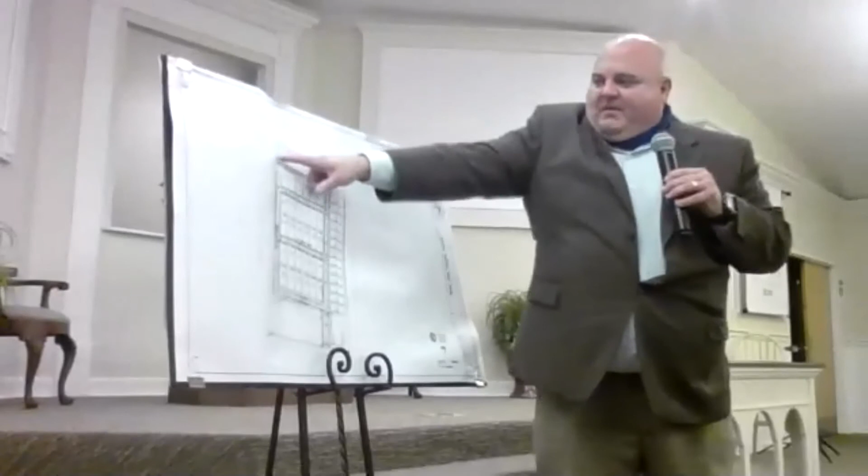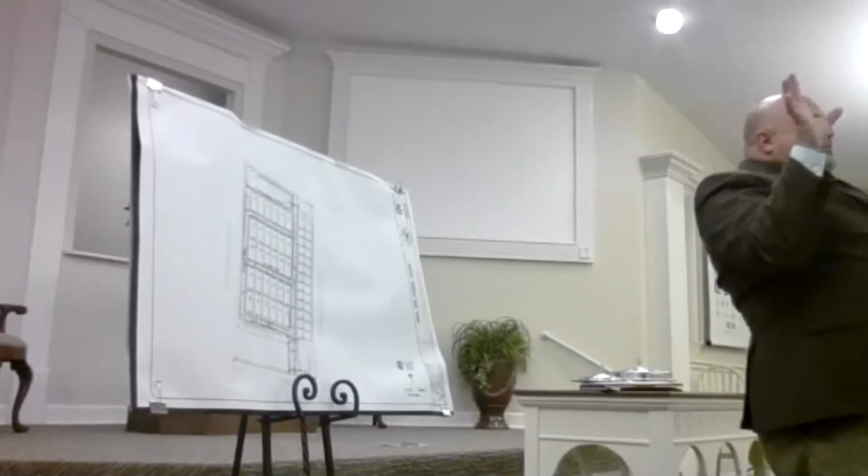Also, relative to detention, we have two detention areas - one in the back and one in the front. The requirement of Metro is that we not only detain the water, but also filter it, so at the end of the day what we discharge must be at or below the pre-developed amount. That is a study that is done - a big book of calculations, and those calculations are reviewed by Metro Stormwater and their engineers. All engineers throughout the United States and most of the world use the same calculations, so we're all on the same sheet of music at the end of the day.

Also, a couple of things that have previously been brought up: the price point will be in the mid 200s. They could reach 300, a little greater than that with options.

Other communities that have been developed with the proposed homes we're calling for here that you can go take a look at are Amberton, Davenport Station, Pinhook Place, Hamilton Church Manor, and Chelsea's Way. Those are located throughout Nashville, and one of them is in Franklin.

We had a previous question regarding students, because student capacity is important to make sure schools are not overloaded. So we reached out to the schools zoned for this development: Mountview Elementary, John F. Kennedy Middle, and Antioch High School. They all have capacity currently for what we are proposing, because again, this is only 43 units, so as subdivisions go, this is very small.

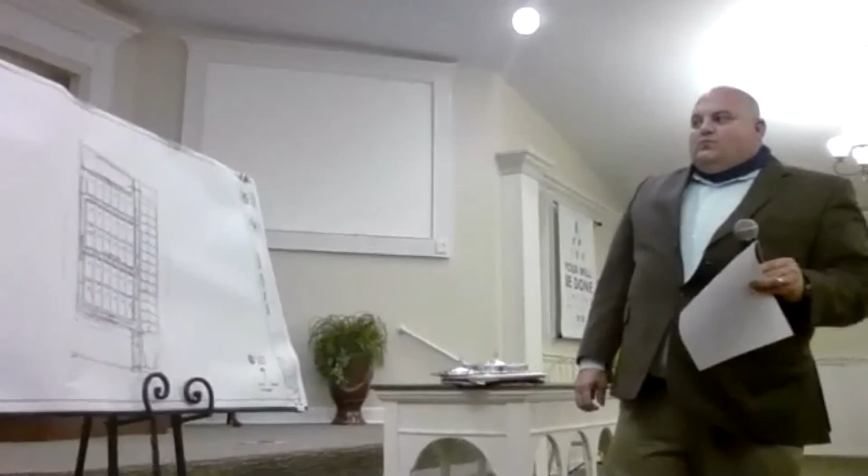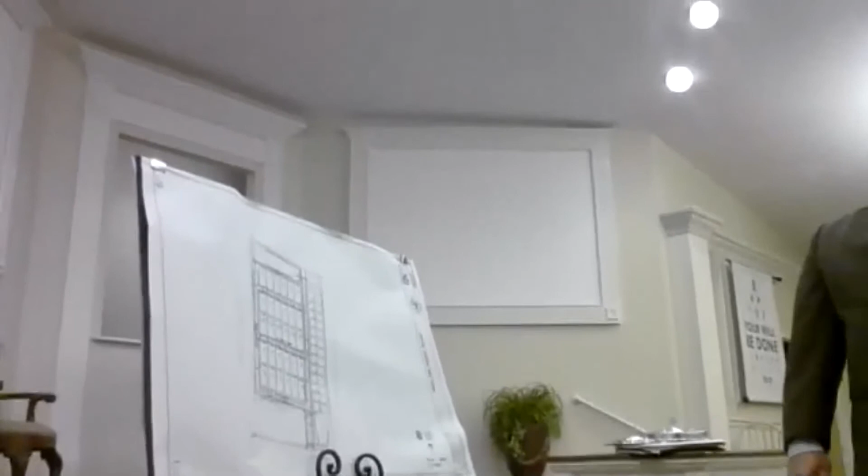Please go ahead, if you'll flip that around. I have a question: you have 43 units there on a grid that puts a lot of traffic on the street. I am the main one of two there now. In our community, we assumed each house would have 2 cars, but you go down through there, some houses have 4 cars, some have 6 or 7 cars. Now with that kind of road pavement and closeness of those lots, you know what that's going to look like.

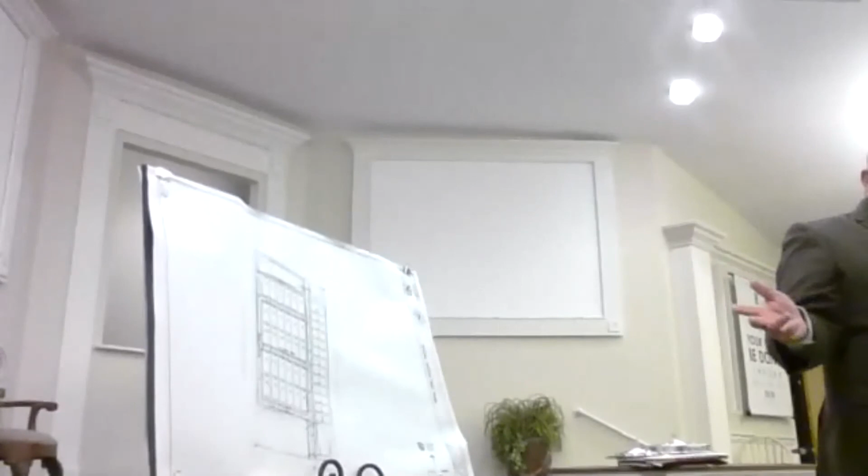The important thing in response to your question is to notice how deep these lots are. They're over 30 yards deep, 33, over 100 foot, about 110 foot deep at depth. That allows us to have 2 cars in the garage. However, as you're probably well aware, your garage becomes a storage area after time, so you don't want a situation where you can't park outside of the garage. In this case, every one of these lots, you can have 2 cars in the garage, 2 cars behind, and in some lots, depending on the footprint, you could even have 2 more behind those.

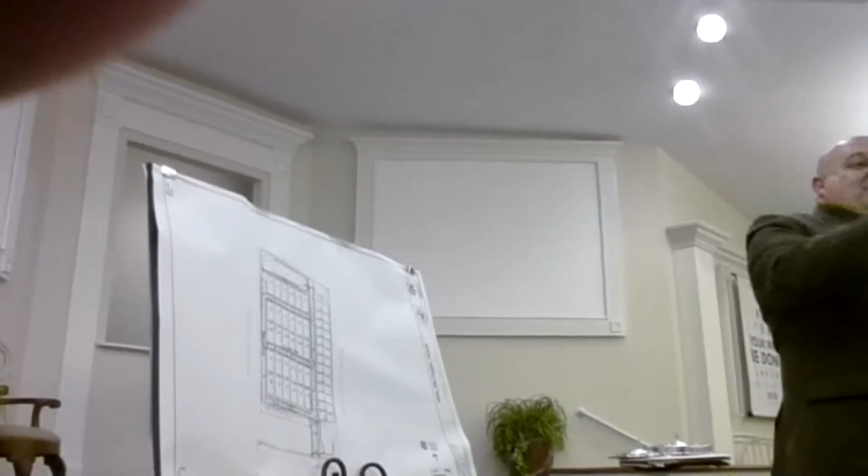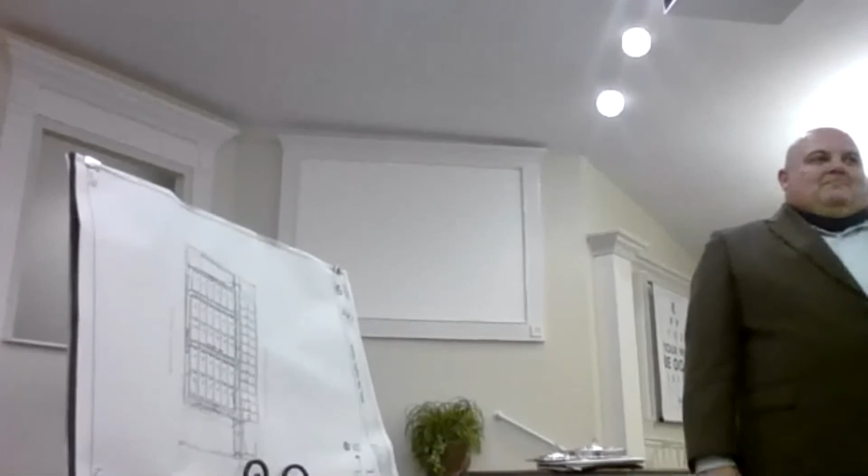Here's my question: typically the garages get filled up, they don't put cars in the garages. Cars behind those two cars block the sidewalks. I know there's codes and all that, and you have people's cars towed and things like that. It also encourages people to park in the opposite flow of direction. In other words, if I'm on the right-hand side driving through there, I'm going to guarantee that at least half of those cars are going to be parked facing me as I'm driving that way. And that's not—you may have a car towed for that also, parking alongside the street.

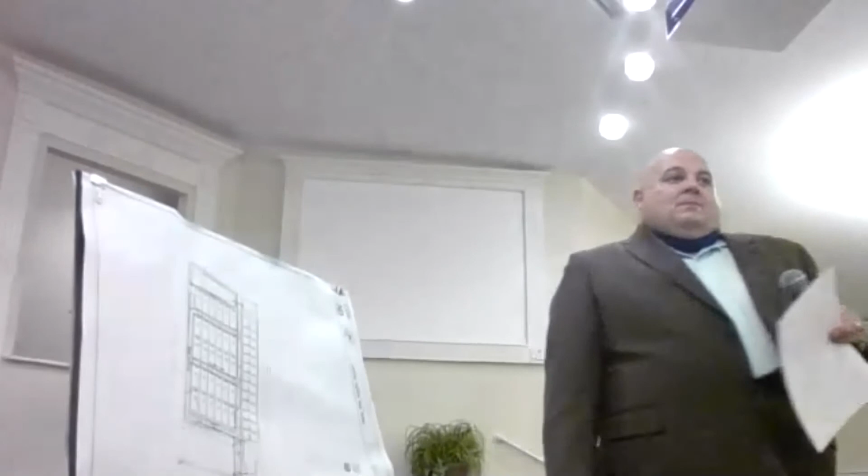But my point is that that's pretty complex. It's not something simple where you've got people in your backyard and things like that. But even in my community, there's generally a problem.

Especially when you get into the loop. We have one loop that basically has 20 cars back. Yeah, it's a lot of cars. I mean, you can't get in there and go around the loop and back out without having to seesaw around and things like that.

And that hasn't changed in over 6 years. Now, the other thing that's interesting is that as we build more of these communities in an area where we kind of started out with not a lot of people, and now we're getting more people.

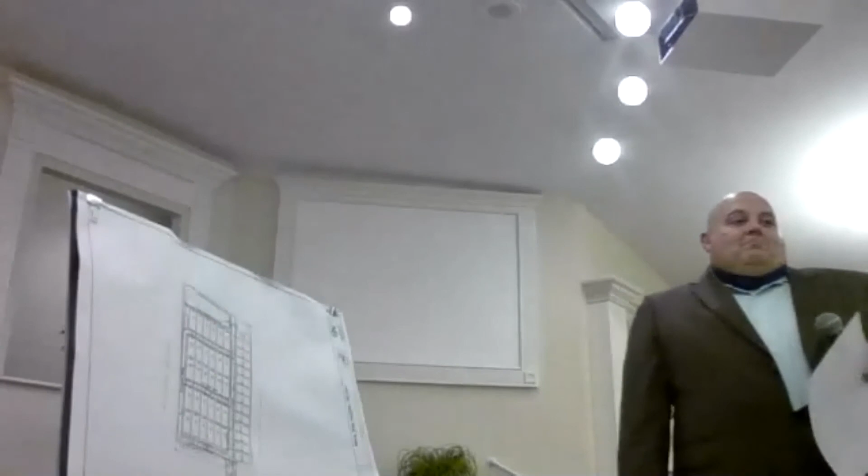We're going to be faced with, as we grow bigger, more cars on the main roads that are traditionally built to handle 2 lanes. A couple of problems with that is the speed conditions, the width of the road, no shoulders, not a lot of them. And some roads, the speeds are incredible, which they should be slowed down. And at nighttime, the lighting is difficult.

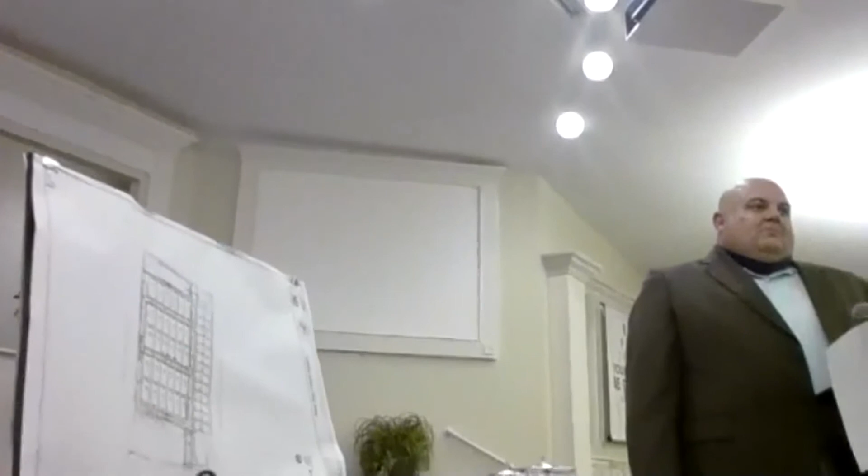You're depending on other people with their bright, zoomy lights trying to get by in a dark area. So as time goes on, there are plans by Metro to take a look at and improve those conditions and to also put appropriate stoplights, so that we're not getting people to get up to maybe the speed of 55 miles an hour, but doing 65 or 70, trying to make a light at those speeds, and it becomes a high impact collision, usually with multiple cars at an intersection meant as a 4-way light type of thing.

I've lived where I live for 15 years, and I've seen everything that I described happen multiple times, year in and year out, but nothing has really changed.

Now, the traffic where I live, it's on a 50-mile-an-hour road. It's hot traffic coming down from the lake, and there's a lot of traffic. Now I have to go around and all this. So there's a lot more truck traffic going on. And we have the same existing lights, virtually none along the stretch. There's a lot of cars that try to get in and get out. And the condition in my neighborhood, my community is 15 years old, and we're already overloaded with cars.

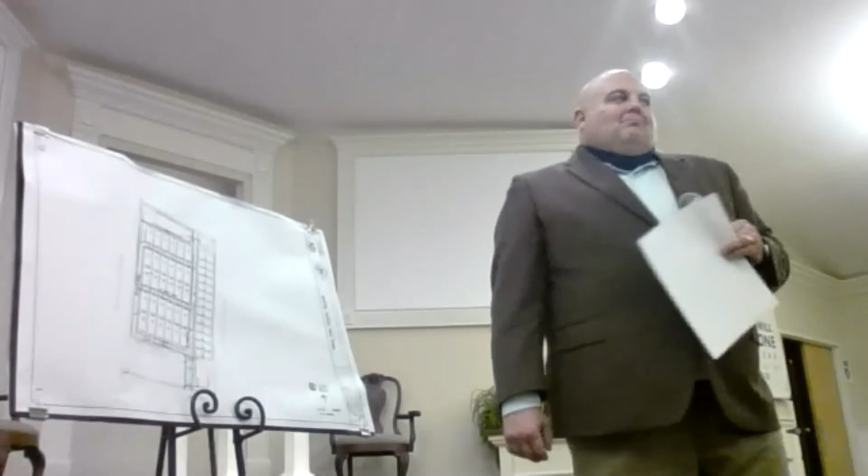It's kind of like... I'm sorry, go ahead.

What I normally do, and I know it sounds dumb, but they know what I mean, is I tell them I want the garage to be set back enough so that I can get 2 cars butt to butt in the driveway. Because when they say 2 cars, what they're talking about normally is a car here and a car there. That's why I said 2 cars butt to butt.

But I also said I don't know about this particular one since we're not actually talking to the developer who's going to develop it, because it's going to Century, and Century is going to be developing it. We've had in the past all this trouble with speeders, so we've asked that we not have roads straight down anymore, that somehow it be curved, or that we put circles in there, because folks are starting, even the new one we were talking about earlier, Carruthers Farms, is having that same trouble because you can come in and go straight in. So anytime you do that, you've got people who just speed in.

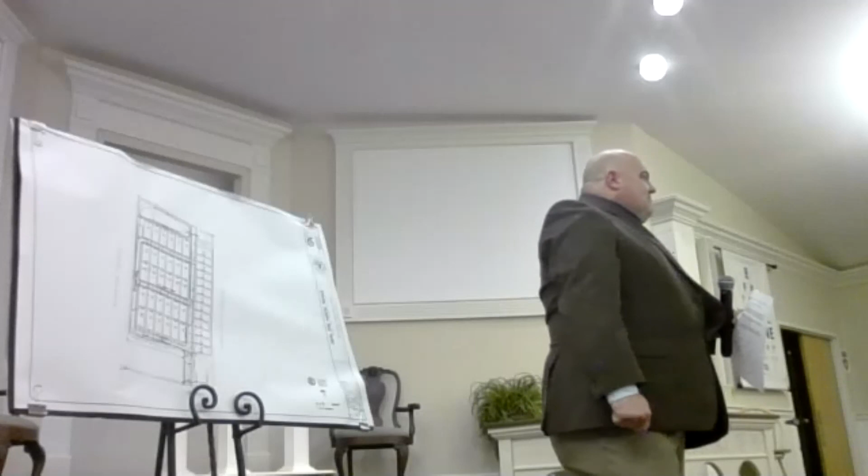So those are 2 of the things, and that butt to butt would help a little bit with what you're talking about in the cul-de-sac, all of those cars, but not all together. So the HOA, we hadn't talked about that, but everybody now is supposed to have an HOA, and giving them some teeth might help with that a little bit. But again, we aren't talking to the person that's actually going to build them, because that's Century. So we don't have Century here to promise what it's going to look like.

So that's one thing that I want you all to think about while we're looking at this one. But the way you communicate concerns is to give it to a person who's going to be talking to the folks that will be developing, so that if we say yes, information gets carried forward.

As we get more into talking with the police force and understanding our roads, the lighting, the safety of them and things like that, you gotta start your message somewhere so it gets to... Oh, correct, sure. I wasn't saying not against that. There's good practices and there's practices that we find don't work very well.

We have something we can do to take the pressure off it. I mean, not eliminate it, but we can relieve some of the pressure. You won't see those multiple cars stacked up on each other in an intersection. You won't see people walking along a dark road because there's no sidewalk. There needs to be streetlights and sidewalks. It's those kinds of things that concern me as we grow, that we have to accommodate the community to be safe.

All right, I think we were back here, and then I had one back here, and then one up here. Really quick, I just want to know what size homes are we doing? Are they doing 3, 4, 5? And I guess I want to piggyback on what the gentleman said here.

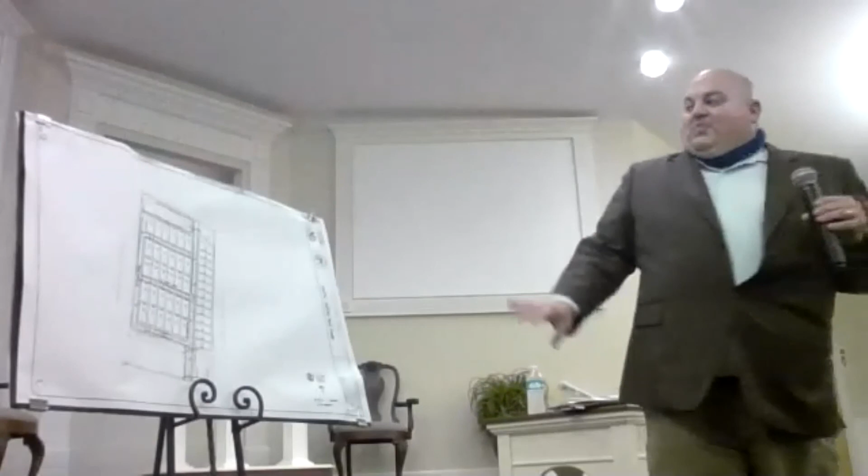Question, what's back there? Those are options, because they're just options. I'm not sure if you're the person I need to ask, but since you're the civil design consultant... Civil design consultant, yes ma'am. With those 43 homes, is there land around where they can go back and say we're going to expand it and put phase 2 on it, or is it just those homes? No, back to the SP, if there were, we'd have to show that. So this is the lot in its entirety. This area back here is not developed, it is privately owned, but the owners that currently own this lot do not own that lot and have, to my knowledge, not approached them. We're not doing anything up here because we don't own it.

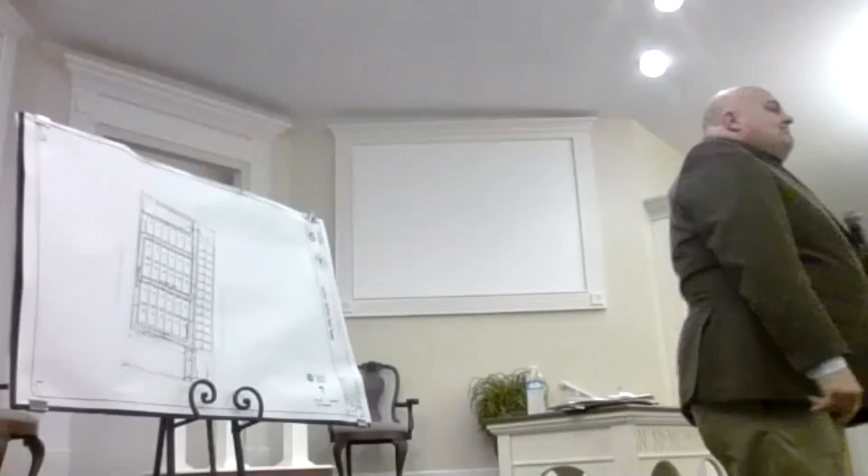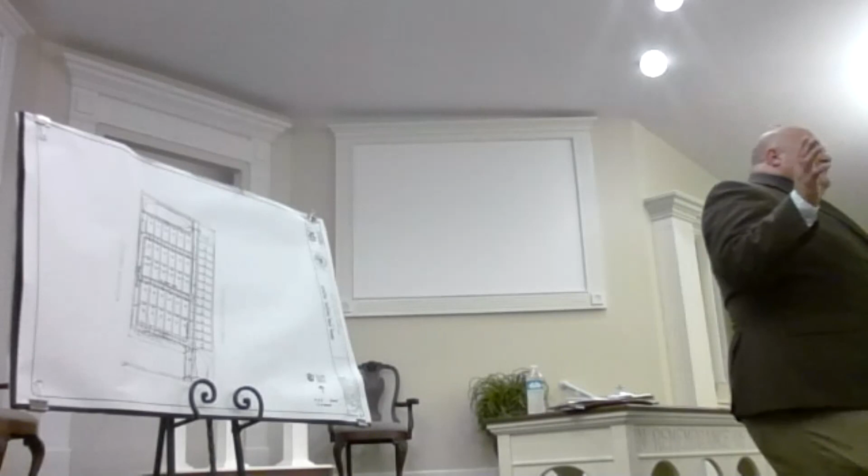As far as the sidewalk, having them not being blocked by cars, with the HOA, is there going to be something put in place that cars cannot block the sidewalk? I'm sure that there would be, absolutely. We designed it so that, with 22 feet, given your standard parking space is 9 by 18 feet, if you're considering your car being 18 feet in depth, you've got 4 feet to play with there to start, so we're setting it up to where they shouldn't block the sidewalks. I think they could add that without any problem.

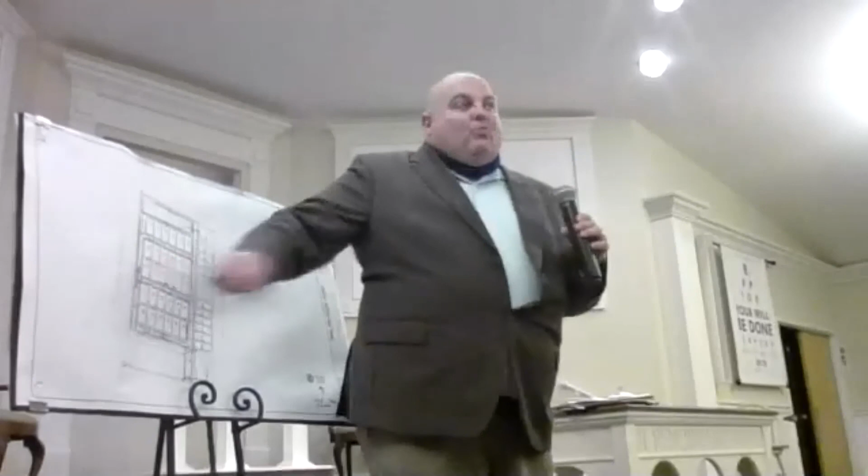Where on Pinhook is this going to be? This is between Lakewood and Weatherstone subdivision. So there are already other subdivisions nearby? That is correct, there's a subdivision both to the left and to the right. This one will not connect to them though. So those 43 homes are going to squeeze into this area that's already kind of developed? That is correct, that is correct, yes.

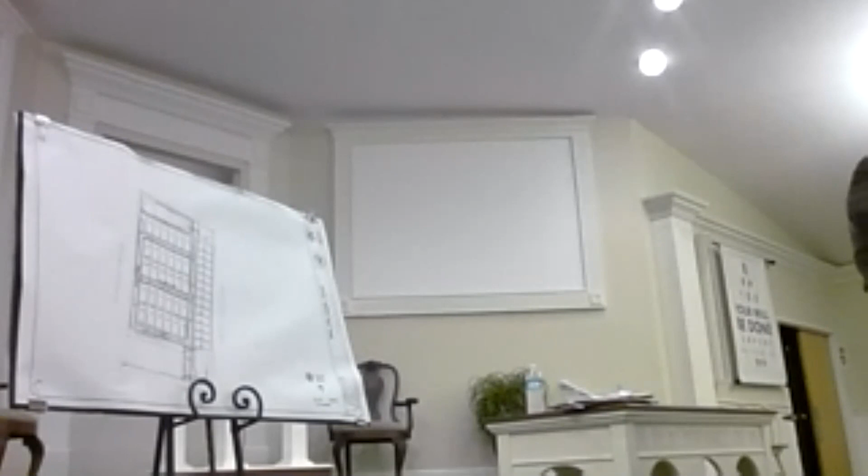Oh, I had him first and then you. Okay, can you tell me the date of your school board review where you said they had capacity? The school board reviews come in based upon planning and their recommendation or requirement that one be done, and they handle that. We took it upon ourselves to contact not only the school board, which we did, and they said they'll defer, planning doesn't need it, that's fine, but we will confirm what the principals told us. We actually went, I myself contacted the individual schools and received a letter even from the elementary school principal that they have capacity for the students. The question was what was the date, and did you get a date for any high school, which is chronically over capacity? I can find that information out for you, and whenever I called them, I can send you the date and actual time.

That school is chronically over capacity, and for you to be squeezing that in, and I guess this is more of a comment for you, council member, with the number of planning that's already approved by council to come in, what does that school then look like if we keep adding density with none of the infrastructure that all these people keep asking about? We're putting people on top of a problem that's already a powder keg without any infrastructure, and into a very explosive situation with our budget and what might happen in December, where it's going to even be more explosive. So I guess I keep wondering why we keep having questions about rezoning or approving zoning to add density to an area that's already overcrowded, overpopulated completely, and no infrastructure. I mean, that just has to be the question.

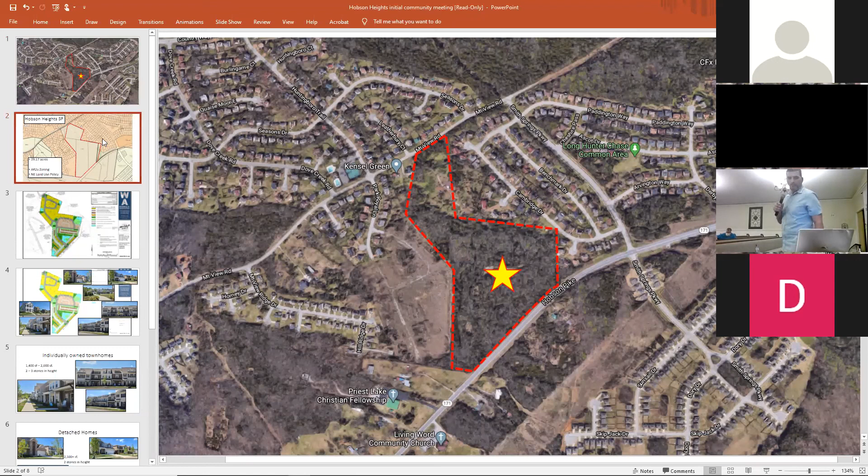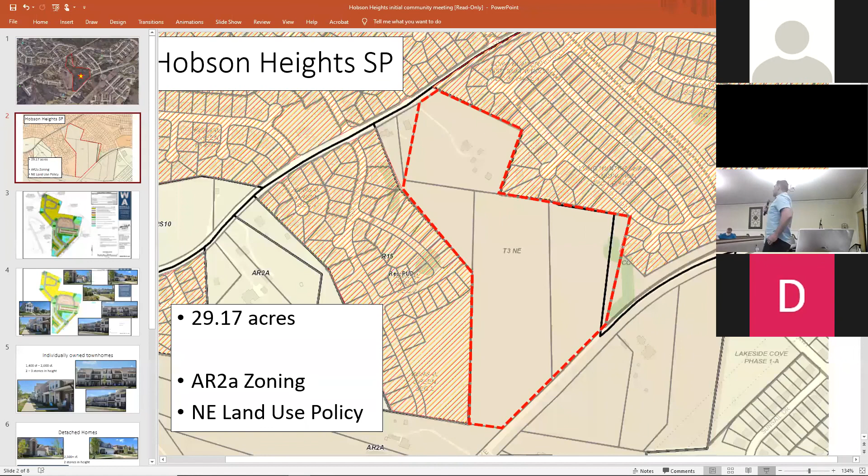When we first started looking at concepts for this property, it's entirely residential. We consulted a lot of the Metro departments, including Planning, Public Works, and Metro Stormwater. One of our guidance documents is the community plan, and it has a policy that's neighborhood evolving, suggesting the character and development intensity could change. So we had a pretty lengthy dialogue with Metro Planning, Public Works, and Stormwater as to what they thought was appropriate for this site. It's currently zoned agricultural, so for us to do anything of significance, we have to rezone it.

I'll also echo what everybody before me has said: our intent is to do an SP, so if we make commitments, they're written into the zoning and enforceable. Working with the Metro departments, we came up with a particular concept, entirely residential. This is page 3 on your handout. Keeping in mind it's a little over 29 acres, we're proposing 194 residential lots. While that sounds intense, it's a density of 6.65 lots per acre, which is pretty consistent with the density you'll find in the surrounding area.

We're proposing a variety of housing types, color-coded on page 3. We've got detached homes on the north side, closer to Mountain View, and they get slightly more intense as we transition south to Hobson Pike. The idea is to create a complete community, so we have different households that can afford and desire to participate. We're proposing smaller townhomes up to larger detached homes. So a young couple or single person could afford to move in, as well as those downsizing who don't want the yard or square footage—they have townhomes available. But if you have children, there are also detached homes to buy into this neighborhood.

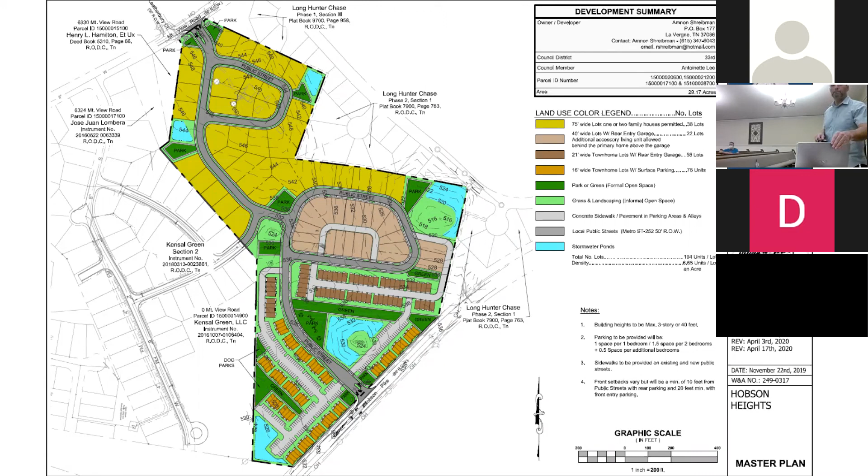Did you raise your hand again? No. Oh, okay, I think he has to leave—he has a 15-year-old daughter who's going to be sitting in the dark. Okay, thank you so much.

I'm sure we're going—I got one more hand right quick. No, yes, huh? Well, Councilmember, she had her hand back there. Councilmember, I did want to point out the engineer will be here. If you have questions, we can have that conversation.